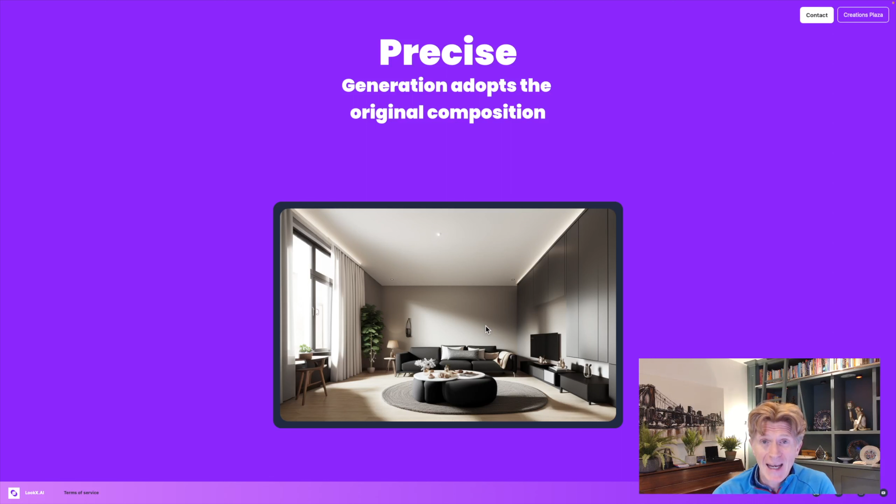So if you want to jump in, just make sure you go to the website and register, which I've already done, and let's go and visit the Creations Plaza, as it's called. It'd be interesting to see if it's saved any of the stuff I played with very briefly, but most of what I'm going to be doing now is, right in front of you, pretty new. So let's get rid of that little survey icon here.

Okay, so what it's now done is presented the home page, where you can share your different work. You can see what other people have been up to, and start off, if you wanted, with some of these presets and generate these. Some really cool ideas — that looks like a Zaha Hadid kind of concept here. In fact, it says by Zaha Hadid, so it's very interesting that they're actually contributing to the website.

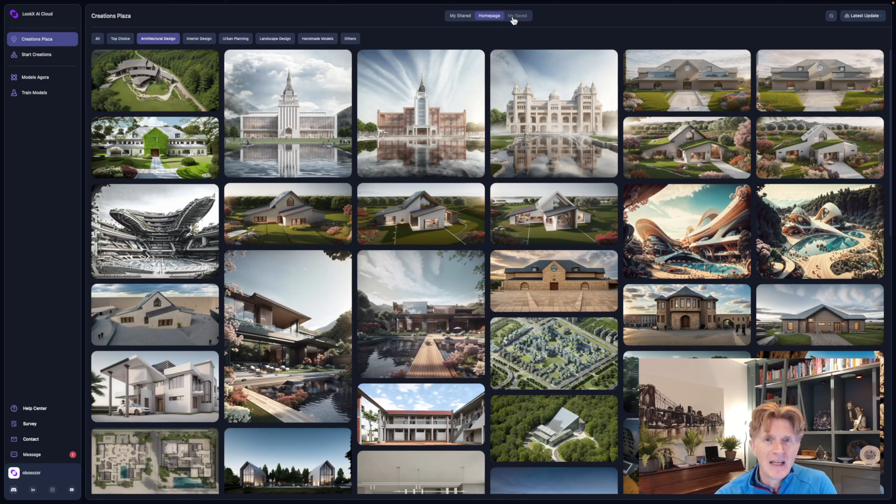Now, I'm keen to actually start something completely from scratch, although I definitely would recommend you view these as well. If I go to my saved ones, I haven't actually got anything in there yet. So let's go through to the Creations Plaza, and when you're ready, you just click Start Creations. The very first thing you're going to need to do, of course, is come up with a concept or prompt.

It just takes a few seconds to progress, as you can see. We can see some of the prompts I've already started — this was for a modern villa. What I did was start with 'a modern villa by the beach.' That was all I said, and these were the initial generations, these four here. If I want, I can click on those and look at them in a slightly bigger sampling size. I like the level of quality — it's a nice size image, and I can flick through these different concepts.

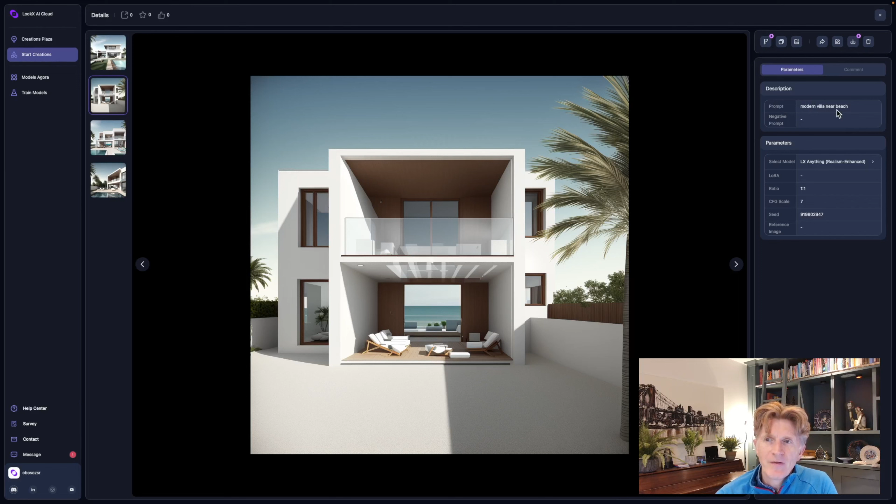As you can see, here was the prompt: modern villa near beach. That was really literally it, very, very simple. But then there was a whole bunch of other features that I could do as well.

So let's just click back onto the Explorer and see all the images. Just to make a couple of points here, if you do want to, you can click on a single image, and basically you can give it some ratings and stars, and you can also share it as well.

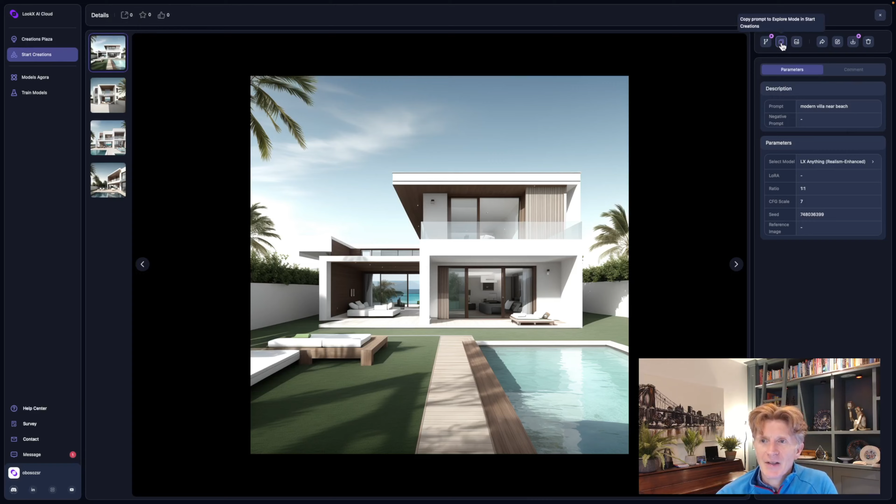Okay, so that's cool. Now, if you do notice, it's got a very, very nice interface, LookX, certainly nicer than Midjourney or DALL-E in my view. You can definitely tell that a designer and an architect has been perhaps involved in the UI and the integration here.

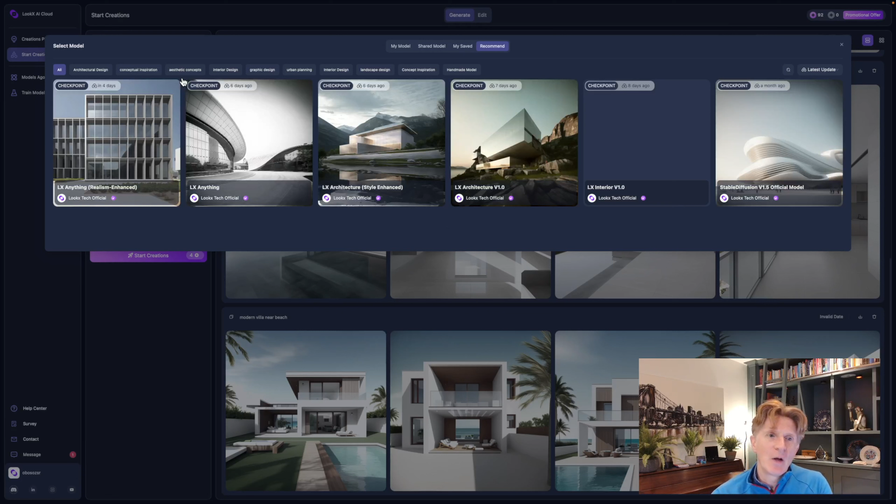So if you close all these little tabs down, basically you will see that you can open them up one by one. We'll start with the base settings, and this is if you want to actually pre-select one of the other concept models. But I don't want to do that right now.

If we go to something called LoRA settings, what you can actually do here is add different backgrounds and different concepts as well. And basically that will mix in to create images of a certain style. So we'll come back and have a look at that in a bit.

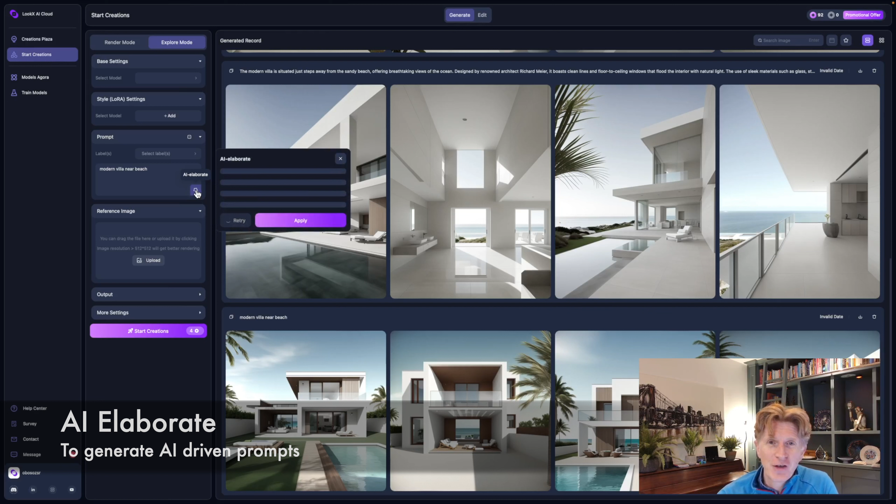But what I really want to do is just focus on the prompt. So here is my very simple prompt, modern villa, as you can see. Now the really nice thing here is you can actually click AI Elaborate. This is the first time I've seen this particular function, where basically the AI will elaborate, and you can see it's actually come up with some text here.

It's a little bit hard to read because of the contrast in the colours. I would have made that a little bit easier to read. But basically I'm going to click OK and apply. I can retry if I don't agree with it, but let's see.

So this is going to be in the style of Frank Gehry, which is interesting, one of my favourite architects actually. The previous one was actually in the style of Richard Meier. So I'm intrigued to see what it will do.

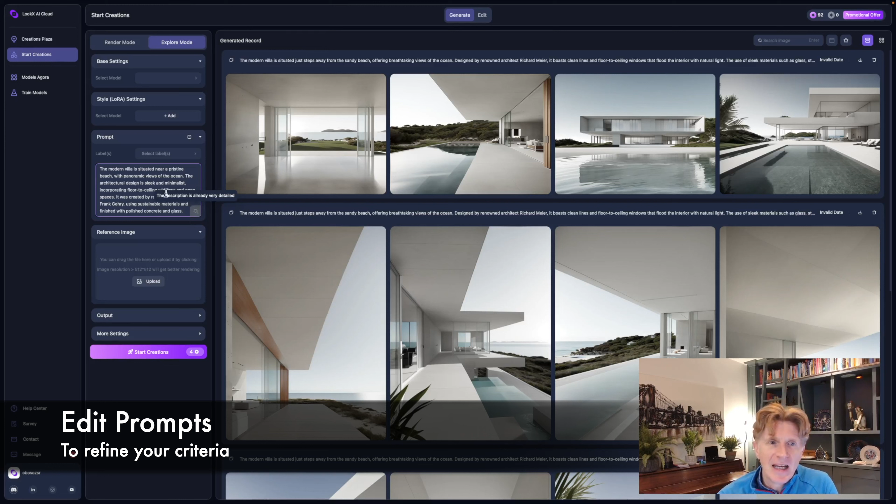Okay, so here actually you can edit the text once you've loaded it in. So if you do want to, you can generate that AI text and then load it in and modify it as well. But let's just go with the suggestion, and then I'll come back and look at these other features down here as well.

Just one more thing before we go ahead. As well as the actual number of creations, you can also change the size definition, so 1 by 1. I think I'll go for 4 by 3, which is always a nice format. And that's pretty much it. Let's just go for it.

There's all these other things like sampling steps as well. And what these will do is make it a more refined image, but take a little bit longer to generate. Okay, so let's go ahead and generate some more images.

As I say, just make sure you go into the base settings and you can click here, and basically these are all the different types of images you can start with as sort of checkpoints. So I'm going to go for this realistic setting and basically click Start Creations.

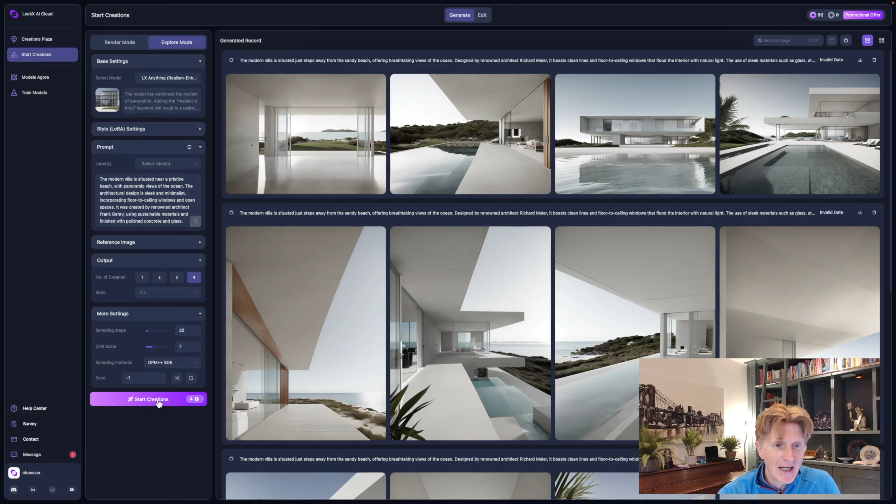Okay, so you can see it's actually progressing now and we get a nice little preview update as these generate. I really like the way you can keep scrolling through what you've done in the past while you're waiting, and you can favorite these. I quite like that one, and basically just store those away in your favorites for the future. So as you develop concepts, definitely let's favorite that one as well. It's kind of worth hanging on to these so that you can refer back to them.

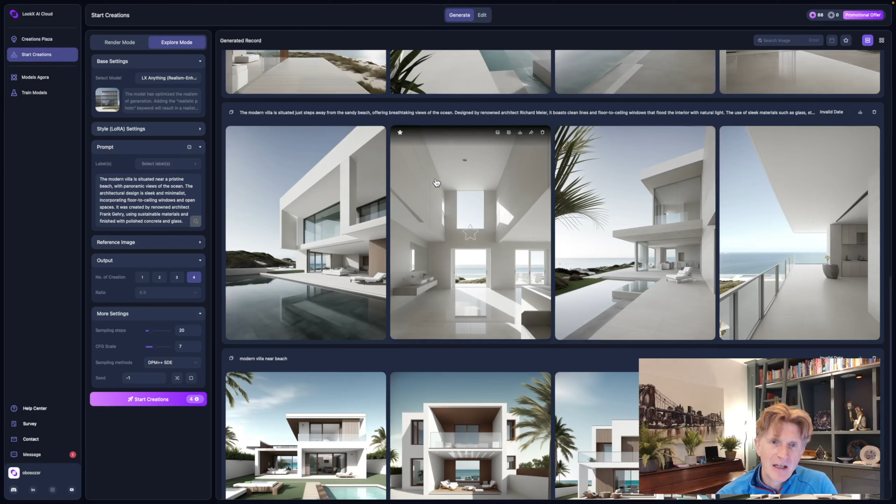Okay, so this is still progressing. We'll have a look at this when it's done in a second. These ones here were the Richard Meier ones, and these ones here apparently are going to be more Frank Gehry. So I'm kind of interested to see what it will do with the different concepts.

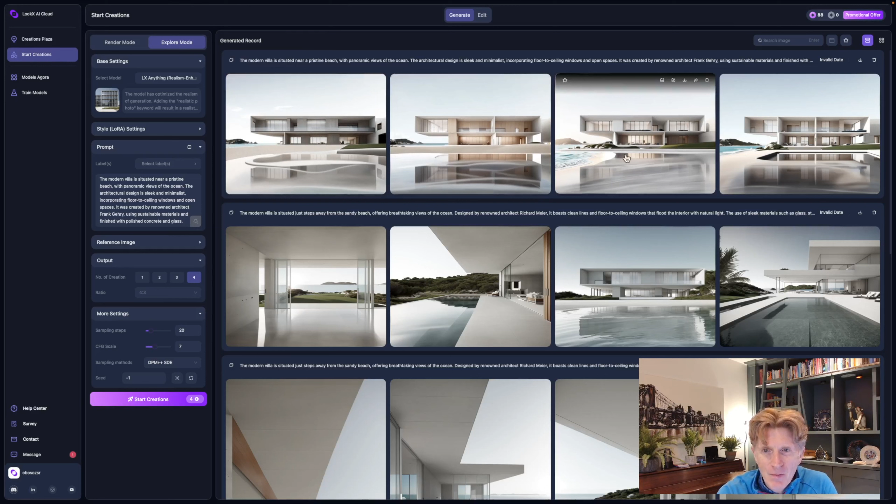Oh wow, actually they look really interesting. They're definitely the same kind of basic concept. Let's have a little look at this one with the sea.

If we click on it now, we can get a really nice big preview. This is definitely a big benefit over the other image generators I've seen. And you can see we've got some different qualities over here.

If you want to, you can easily just click publish, and I could publish that to creations. So I might just do that. That will be published now, and then other people can comment on that.

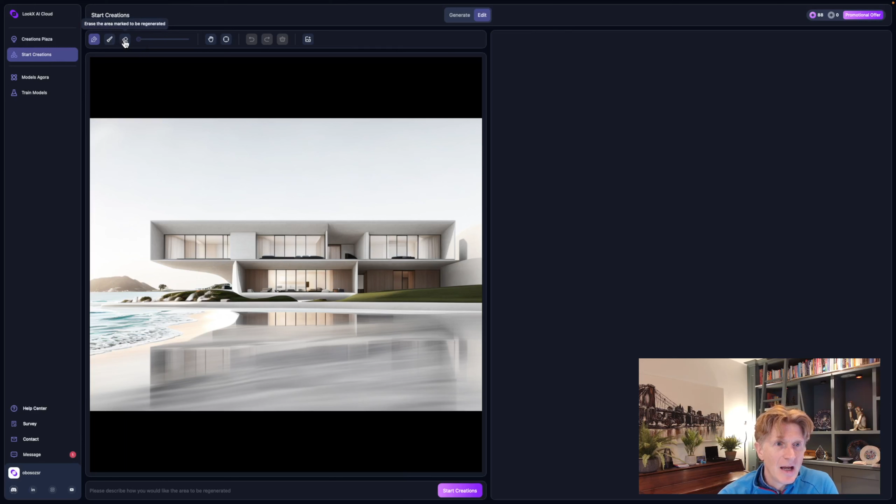That's very straightforward. If I want to, I can click on the edit button, and in the edit section here, you can see we can do a bit of finishing off. So what can we do? We can actually do a little bit of erasing and a bit of moving, very basic adding of images and stuff like that.

This looks pretty early days to me, so it looks like you can basically add things like reference images and backgrounds, that sort of thing. Okay, so we'll come back out of that and go back to our Generate tab.

Let's take a look at how we can export one of these images at high resolution. When you're ready, all you need to do is go to this icon here and we can scale up. There's different qualities here, 10 to 20 seconds.

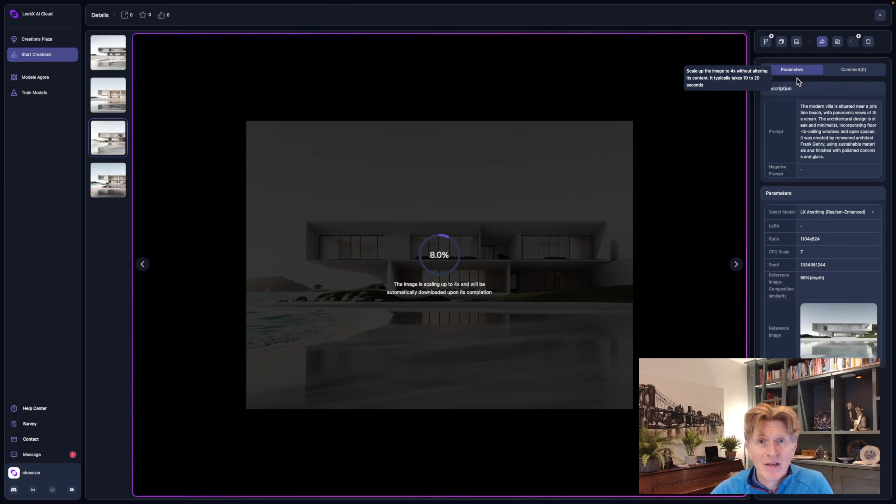Looks like that one actually takes a bit longer, so we'll go for the 4 times. This will take 10 to 20 seconds and it will give me some updating progress on this task. Then we can export this as a pretty high resolution image suitable for our early stage conceptual needs.

Okay, so here we are with a more refined image. With this particular one, I clicked onto the setting and went for the ultimate resolution here, the 2x scale up with optimization.

If you click onto the little button here, this is really nice, the way you get this sort of slider. It's a bit like before and after in Photoshop. I really like the way you can click through the different reference images, and you can see the reference image and then see what it's actually generated.

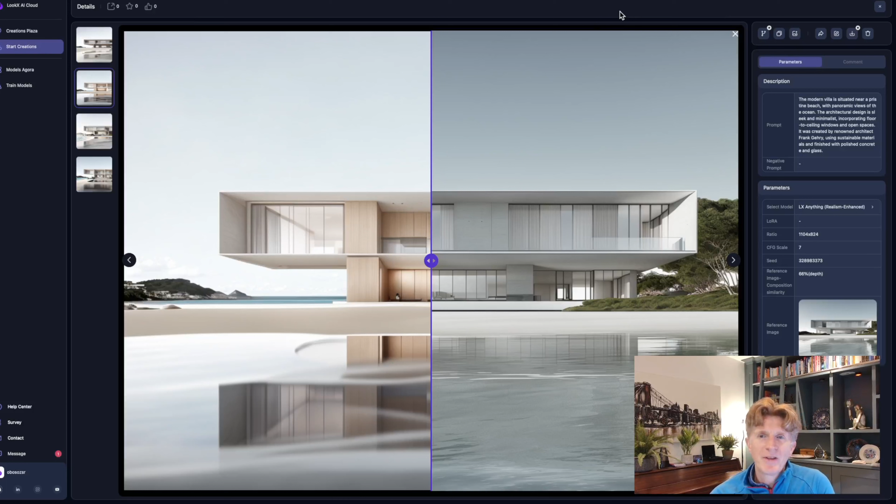In terms of new imagery, it took me a little while to work out where the images were downloading to, but you'll notice that, certainly on the Mac, they're already automatically downloaded in your downloads folder.

So if I right click and click open, let me just pop out full screen, I can actually have a look at that final quality image. And it looks pretty good, much better resolution than some of the image generators I've tried.

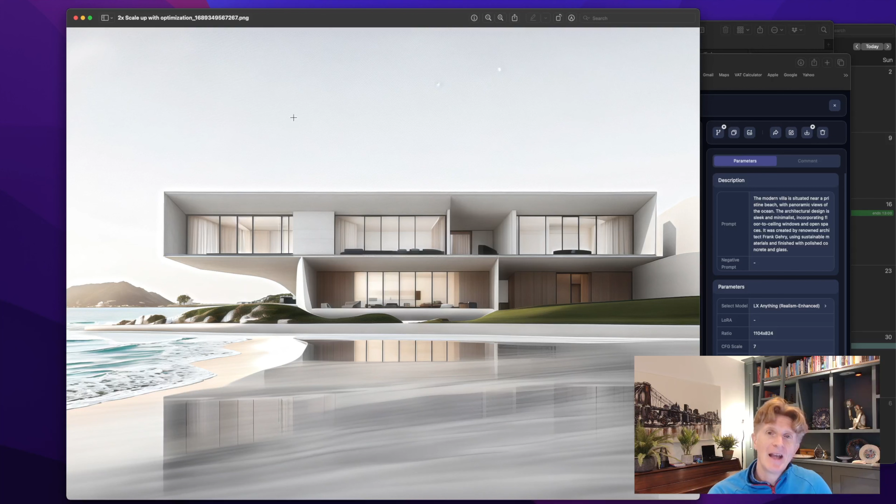So that would be ready for me to pop into Photoshop and do a bit of manual editing or tweaking as well. And I'm really impressed by the level of quality.

So overall, my impressions of the interface are good. I think it looks very slick, I like the way they've done this, and I do like the way you can share things as well. There's all sorts of inspiration here that you can take a look at.

So what do you think, guys? I think it's a really interesting development to see AI being tailored much more for architectural application as opposed to more general image creation. You can see it works pretty well in my view.

So it's going to be very exciting to see where this technology takes us in the future, but it's definitely something I think you should try. I think the only way to embrace this technology is to give it a go and see what you can do with it and how you might incorporate it into your workflow. I'm definitely quite excited to see how this implements into my personal workflows as an architect as well.